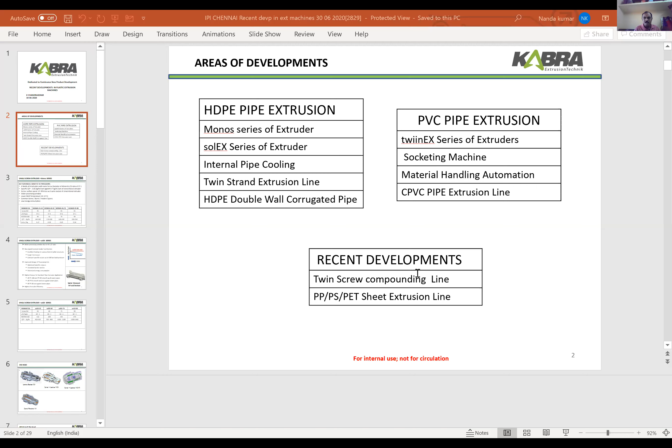Next, another one. Yes, sir. Sir, is it getting changed or not? No, it's not changing. I'm unable to change. Yeah. Okay, sir. Yes.

Now you see, there are various models I just displayed for your technical knowledge purpose.

Granules are feeding. The granules are being crushed into powder, and in the next stage you will be able to save power on this, because most of the action takes place in the higher friction, and because of the groove you are able to crush the material. So this is the technology compared to old technology.

In this new technology, because of high friction, a lot of heat is being generated. The barrel portion simultaneously has to be cooled to maintain the same temperature. We should not increase the temperature level. So these are all technology-wise developments made on PE extrusion lines. So next.

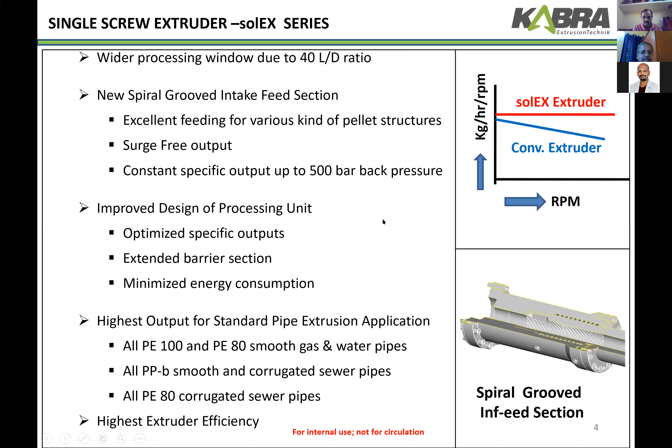So again, there are a lot of materials, PE100, PE80 grade of material. So this is next. You can see again in the same 45, we are able to produce 450 to 500 kgs per hour also. Motor capacity, you can see, is 132 kilowatt. Screw diameter we have not changed. Only the L/D ratio, from 37 we made it to 40:1.

Then the next model, 60 mm is the screw diameter. We are able to produce 800 kgs per hour. And another model we have is 75. The motor capacity is 315. The output will be around 1,100 to 1,200 kgs per hour. Then there is a model, solEX 90.

The motor capacity is 370. The output range is between 1300 to 1400. So this is today's reality, because earlier, 20 years back, for 1300 kilo we used to use a 150 mm screw diameter. That takes more heating load, more power also. That means your running cost on the older generation machines will be very high.

Now in today's scenario, as I already said, you have to save on power. Raw material cost is same, labor cost is same. You cannot reduce on that side. For productivity, you have to reduce the power cost. That is a key factor for running today's highly competitive industry. So people have to select a good line with a good output range, depending on your pipe diameter.

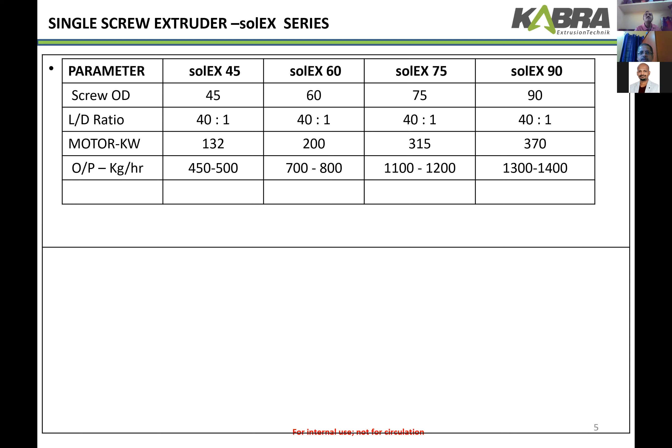So these are all again dies. We have various die designs for better mixing, because normally HDPE pipes with black color have to be blended properly. So we have lattice die, spiral lattice, and spiral mandrel type. There are so many. Most customers prefer this spiral plus lattice VSI. This has a very good design for controlling the material, and you can maintain the flow uniformly.

This design was developed by the Germans, and it has been introduced in India also. We already supplied a number of lines, like to a customer called Mega Fibers, Mega Engineering. They have a lot of government orders to execute, like the Cholavaram water project, and a lot in the irrigation sector. They have taken this big order, big tender.

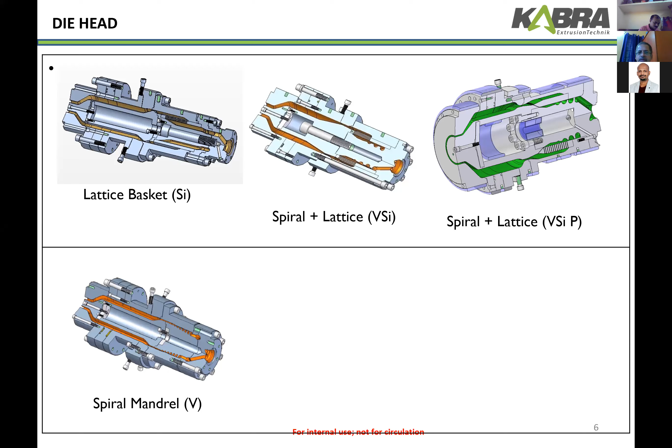Next. And the one next. Yeah.

So you can see the internal construction of the die. There are various parts, machined with perfection and assembled nicely so that there should not be any leakage because of the higher output. It's perfectly machined and aligned properly. Basically, PE100 is a very tough material. You can process PE100, PE80, or PE63, whichever grade. This die is suitable for all sorts of material.

As of today, PE100 is being developed all over, like by Borouge and Reliance. PE100 is today's material grade available in India. So that material can also be processed in this die. Next.

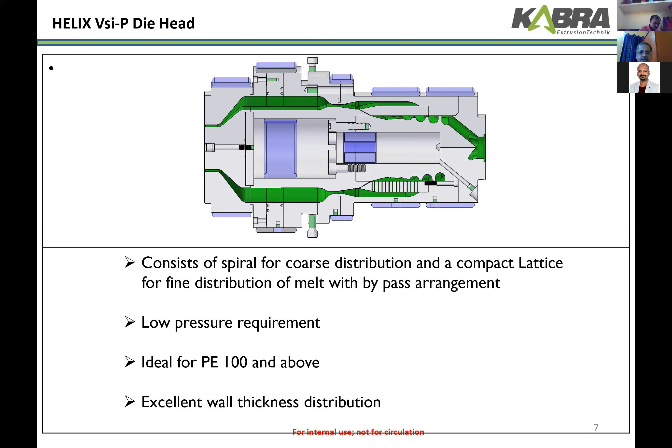So you can see the wall thickness variation, because we have a scanner. With the scanner, we have checked all the die models. You can see the wall thickness control is average in the lattice basket die. With the spiral type also there is a lot of variation, but with spiral plus lattice VSI, you have excellent thickness distribution, and you can measure it at any time of the production.

There will be a very close tolerance, so that you can save on material with wall thickness control, and your end product will be almost the same pipe to pipe. Instead of 10%, you will be able to produce the pipes within 1 or 2% tolerance. Next.

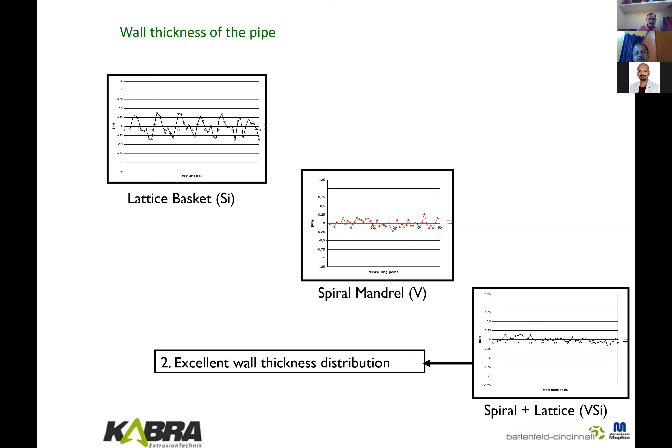If you have a lot of production, a lot of order requirement for 63 and 90 mm pipe, you can produce two pipes, so that you can execute the order in a shorter period. That is the motto of this machine. Simultaneously, you can save power, labor and space also.

Today space is a big constraint. Up to 63 means you have to go for coiling the pipe also, and that requires very huge space. So nowadays people are opting for twin pipe in most cases. Next.

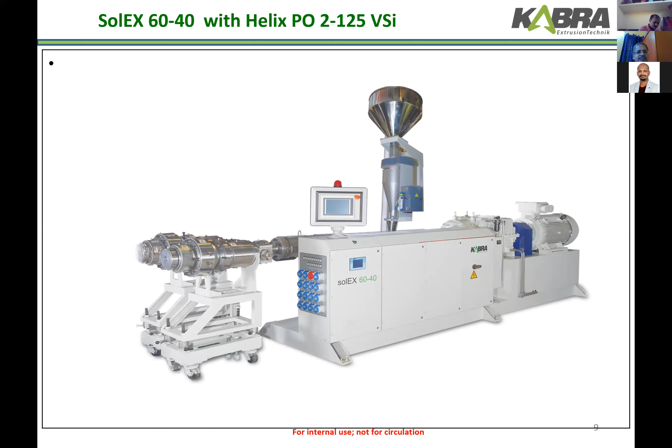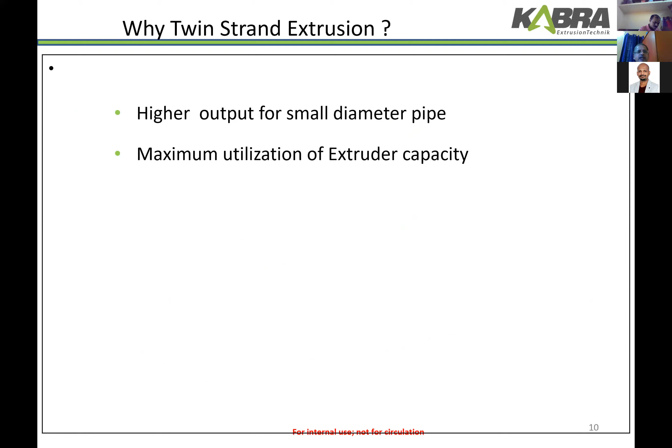As I already mentioned, for small diameter pipe, utilization of extruder capacity: with a bigger extruder, you can utilize maximum floor space. As I told you, there will be 40% saving of floor space and power. Simultaneous production of two different pipe sizes. You also save 50% on labor. That means finally the end producer gets price and performance, a big saving to the customer. Next.

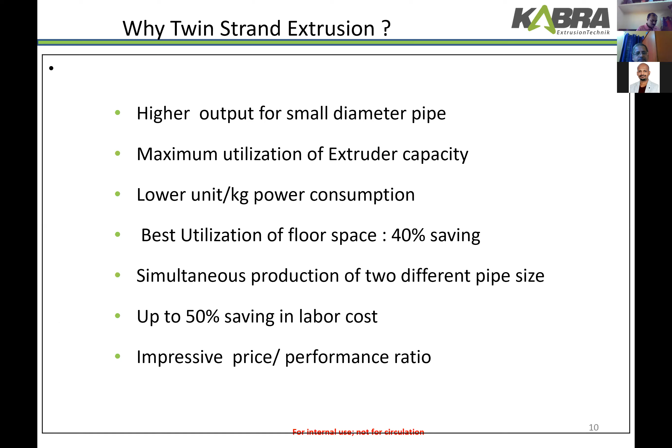We have made a small comparison of a single strand model and a twin strand, and what the energy bill is, so that you have a practical idea of how much you are going to save. The specifications of both models are almost the same. Only in the downstream, instead of a single die, we are offering a twin die and twin tank, all twin downstream.

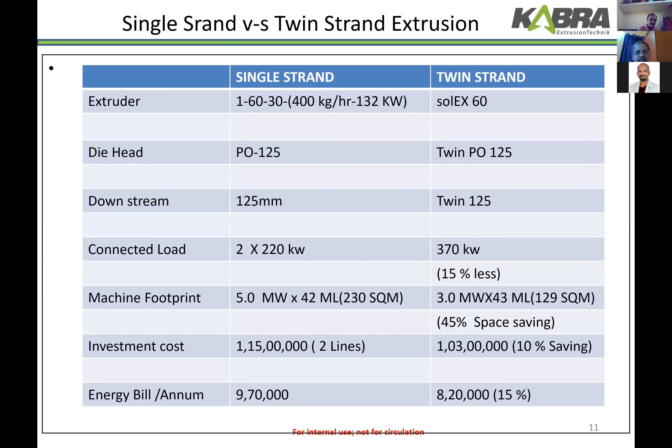So finally, you see the investment for two lines is costing around 1 crore 15 lakhs. Here, the twin line is costing... here you are getting 8,20,000, a 15% saving per annum on the power bill. Next.